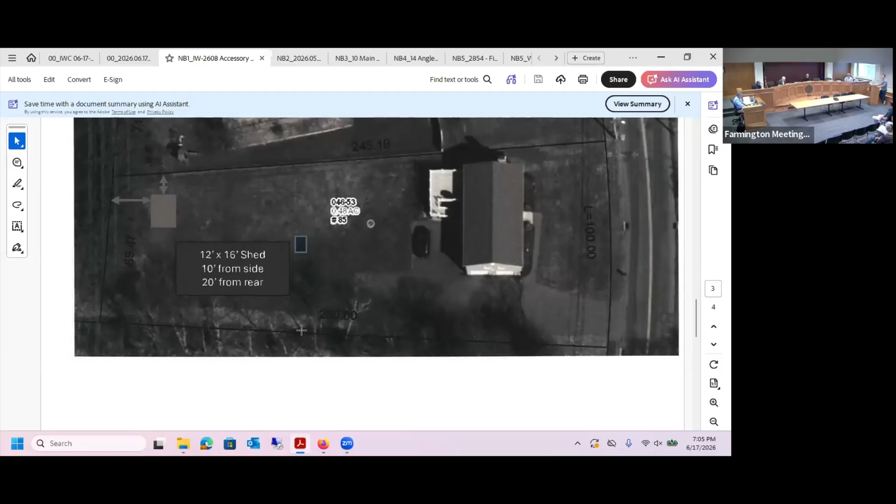Do you want me to repropose, just a quick summary again? Yep, if anything's changed. Adam Okarski, 85 West District. I'm looking to put a 12 by 16 prefabricated shed in the back corner of my property, the northwest corner. There's an easement and a storm drainage ditch along the south side that goes to wetlands further back. No change to the plan. Still the prefab shed, still no excavation, just 3 to 6 inches of gravel pad for it.

Excuse me, Bruce. Yes, sir. On the actions, it says we performed the site walk. No, I noticed that a little earlier. It's a mistake on my part. There was no site walk, but there was a determination of non-significance.

And you're agreeable to erosion control around the area when they're doing the delivery? Well, I don't think he needs it now since he said they're not doing any excavation. All they're doing is putting out a gravel pad. Okay, so you probably don't need it then.

Questions from the commission? Richard, no questions. Dan? No, Dan's not here. Mark Simpson, no questions. Alana, no questions. Frank, no questions. Andre, any questions? We accepted the application at the last meeting, so I have no questions either.

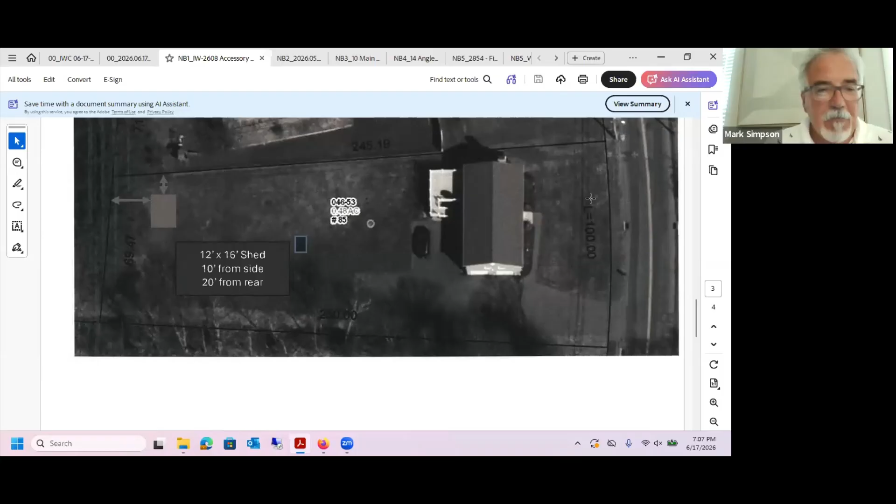Seeing there's no questions, the chair will entertain a motion to approve the application. So moved, Mark seconds. Motion is made and seconded to approve the application. All those in favor say aye. Aye. Opposed? Abstain? Motion passes.

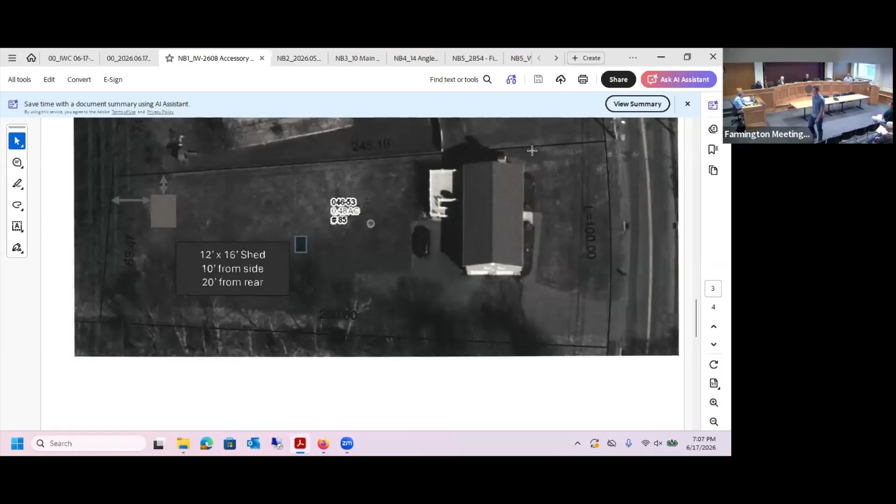Next item on the agenda, Jeffrey Moose, 152 Wood Pond. Good evening. I suppose just reading the description from June 3rd would be the most accurate. Can you give your name? Sorry, Jeffrey Moose, 152 Woodpond Road in Farmington.

It's an application to install a maintenance path for lawn equipment in our backyard and additionally install a dry well to handle the runoff. That pretty well cover it? Just for the record, we did have a site walk at the residence on June 11th. We need to determine significance based on the information from our site walk. I think it's a pretty minor project and shouldn't require a public hearing.

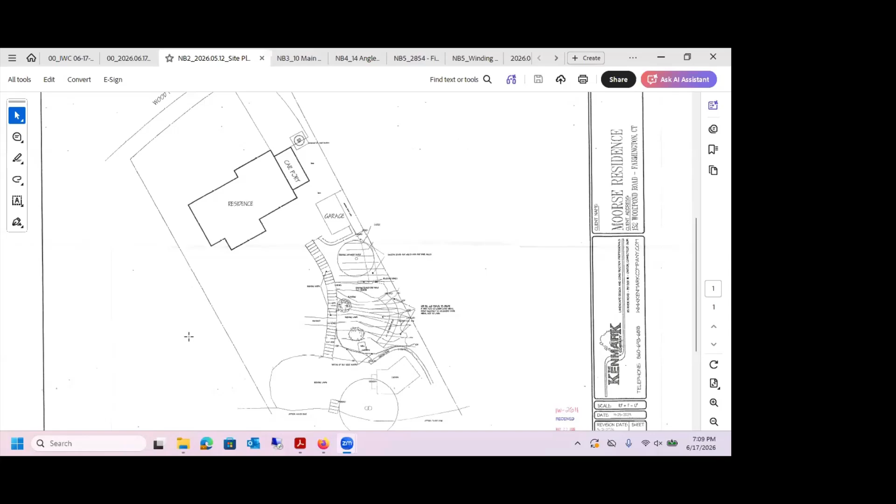But let's see what the rest of the commission says. Andre, do you feel it requires a public hearing? I do not think it does. No. Rich Berlandi? Non-significant regulated activity. Very good.

Mark? Non-significant. Okay. Alana? Not significant. Frank? Non-significant.

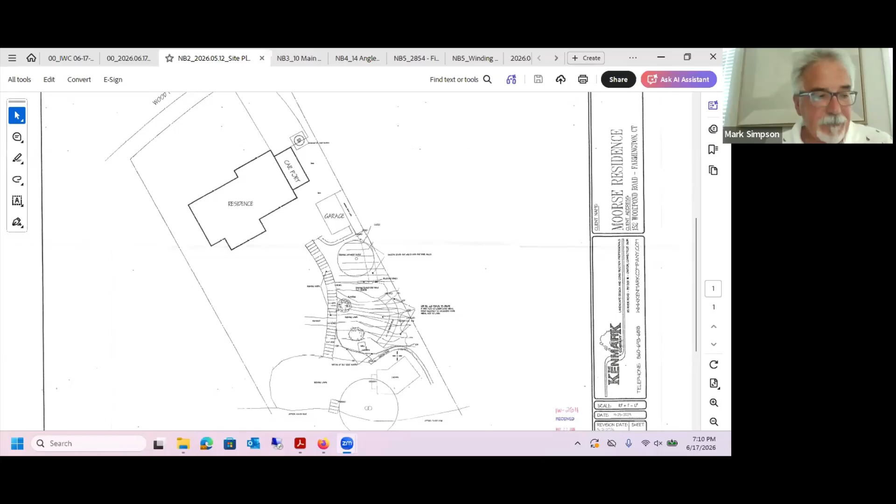Okay, so the chair will entertain a motion that this is a non-significant activity. I so moved, Mark seconds. Motion was made and seconded that this is not a significant activity. All those in favor say aye. Aye. Abstain. Motion passes.

All right, and now, did they provide an estimated volume of fill? Yes, you did. And at the site meeting, we just talked about the erosion control and. Yes. All right, are there any other questions from the commission? No. Any questions from the commission online? No. Seeing there's no further questions, the chair will entertain a motion to approve the application for Wood Pond.

So moved. 152 Wood Pond Road. Second. Motion was made and seconded to approve the application for 152 Wood Pond Road.

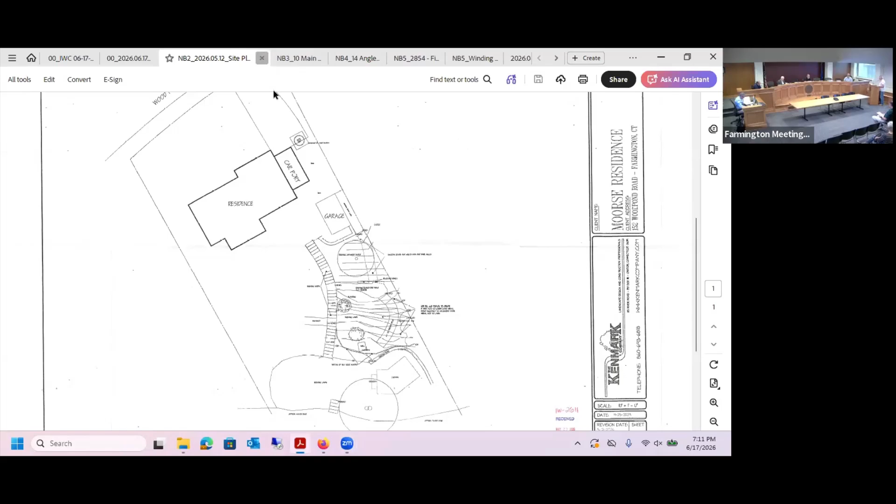All those in favor say aye. Aye. Opposed? Abstain? Motion passes. So work with Bruce, let him know when the work's starting, so they can get out and check the erosion control.

Good luck with your project. Okay, thanks so much. Say hi to that eagle that we saw here. Thank you very much. Have a good night.

Okay, next item on the agenda, Jason Levesque, 10 Main Gate. Can we have your name and address for the record, please? Good evening, Jason Levesque, 52 Climax Road, Simsbury, Connecticut. Agent for the current owners of 10 Main Gate, 8446 Main Gate.

We are proposing a single-family new construction with a pool house and a pool. Most of the regulated activity or upland review cuts across the existing pool or the proposed pool and pool house there.

Some work, Bruce, I have control of this, right? No, you don't. Okay, no, what do you want? We can go down to the second page. Next page, please. Is this the updated version?

Yep, it is, this is the updated version. I'm sorry, I can see that now. You should be able to scroll down to the left. Where do you want to go? All right. Yeah, all right, you're good.

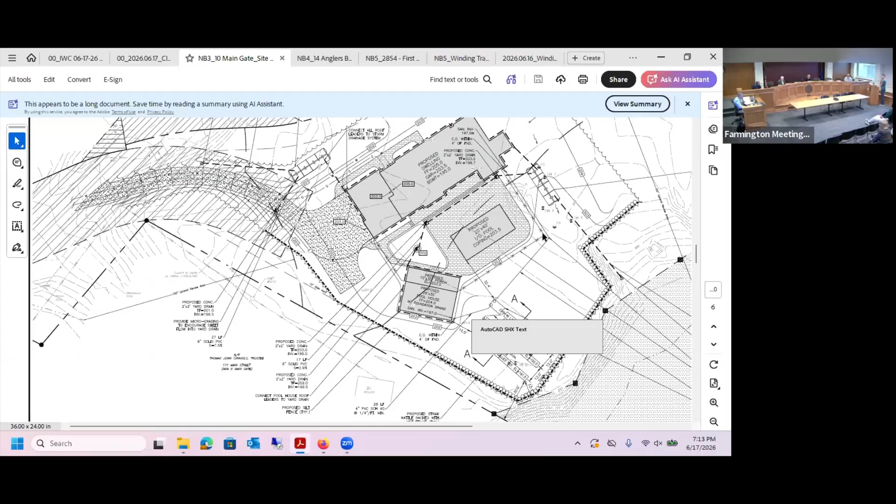Yeah, that's fine. I had some comments from Bruce, and I believe some concerns from you guys from the board that I wanted to take care of right away. So that included the straw wattle, erosion control down gradient of all the work proposed.

Also included clearing limits. So we can actually, Bruce, if you don't mind, scroll up, so you can see the wood line, the clearing limits going around the property.

Also put in signage for conservation, just to note that we're retaining the conservation there. So it's at that corner as well as the northeast corner on the upper side of this plan here.

When we overlay, do you have the old plan by chance? I do, yes I do, with the old site plan. If we need to, the difference is substantial from the original proposal, the subdivision. Yeah, no, I did this here, I think we used last time.

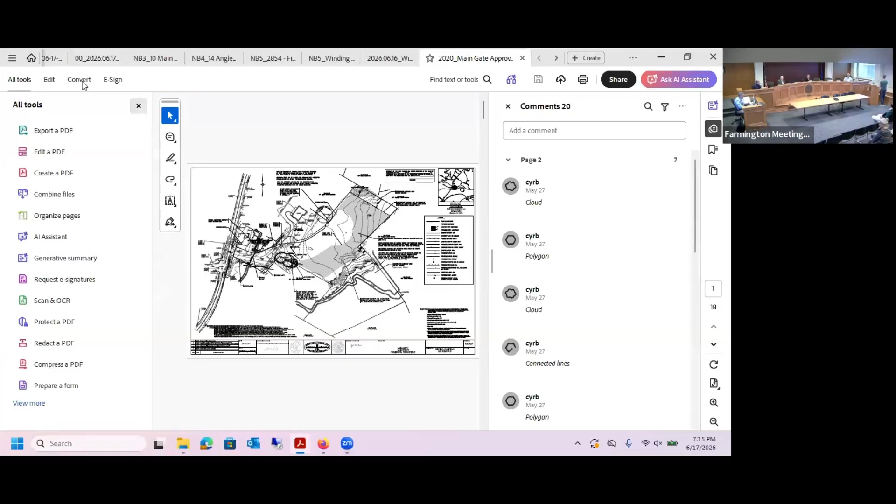That's fine, you don't have to, unless there's questions from the board. But what was passed last time actually had considerably less upland review area or wetlands area disturbed. Even on that one part of the property, a lot less clearing in the regulated area.

Here's the approximate location of the new home. Here's the approved locations of the previous homes here. Yeah, perfect, thank you.

I believe you went out for a site walk, saw the stakes there. I'm hoping that was helpful. I'll leave it up right now to any questions you may have. Okay, thank you.

Bruce, I have a question. Is all the conservation easement paperwork in place and already filed? Yes, the conservation easement and the conservation easement map and document have both been filed. The only thing not done was, as discussed, I would want all these easements demarcated with our medallions. Okay, all right. Yep.

And you changed from hooking up to the sewers to an on-site system, because with one house compared to four houses, you didn't have the need to rebuild the roadway and put in the sewer system. Correct, yes. Talking to the town, no need to bring sewer up for one house.

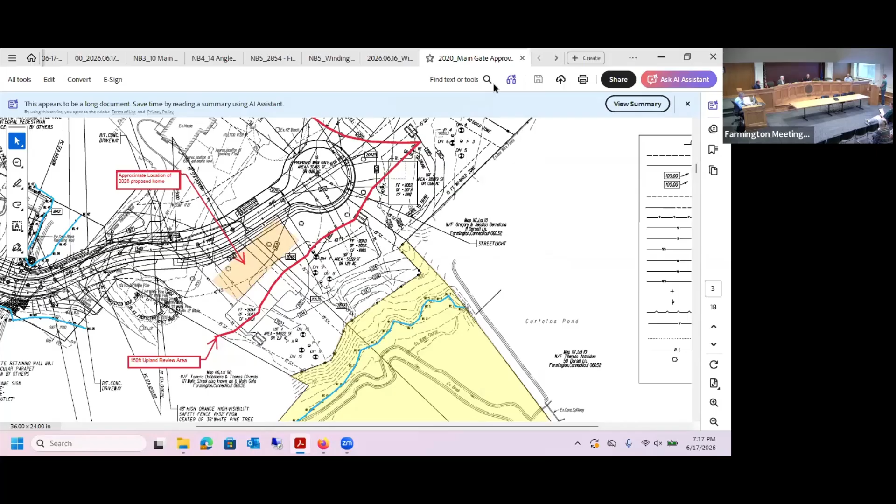We do have to determine if this is significant from findings for standards. I think it's not, but let me go back to you, Rich. Do you think this is not significant? Yeah, I would say it's a non-significant activity.

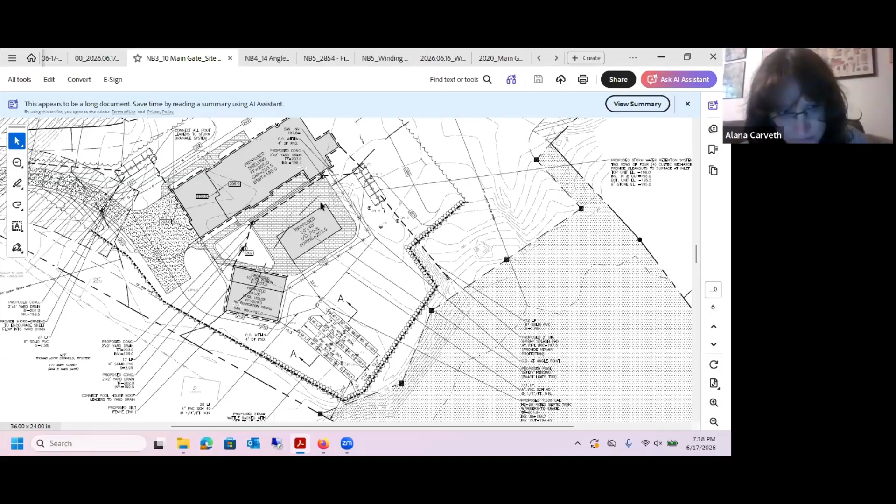All right, Mark Simpson, do you have any questions and do you think this is not significant? No questions, not significant. Alana? No questions and not significant. Frank? No questions, not significant. Andre? No questions and not significant. Okay, all right, since there's no other questions and there's agreement, this is not significant.

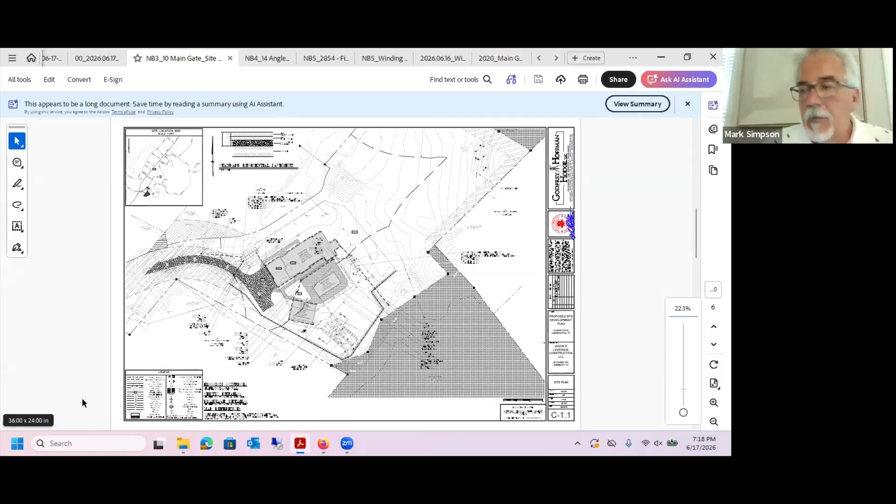Let's entertain a motion that this is a non-significant project. So moved. Motion's been made and seconded, Mark. Okay, motion's been made and seconded, this is not significant. All those in favor say aye. Aye. Ayes. Opposed? Abstained? Motion passes.

Excuse me sir, is the public allowed to ask any questions? No, because it's not a public hearing, and I apologize, I probably should have told you, I wasn't even thinking of that, it's not a public hearing. Couple of questions on the neighbors. Right, the setback. Again, you can work with Bruce if you have any questions. Okay. Somebody come in, I'm looking right now.

Oh, we're good. Oh, Andre just tried getting back in. Sounds like he's probably having some audio problem.

Okay. Right. All right, so a motion's been made that this is not significant. Now the chair will entertain a motion to approve the application.

So move, Mark. If you don't mind, Chair, I'd like to add a few items: he's done the tree clearing, the erosion control is done, but C, clearly depict the limits of the driveway improvements, and D is the cross section of the driveway. And I think that was it.

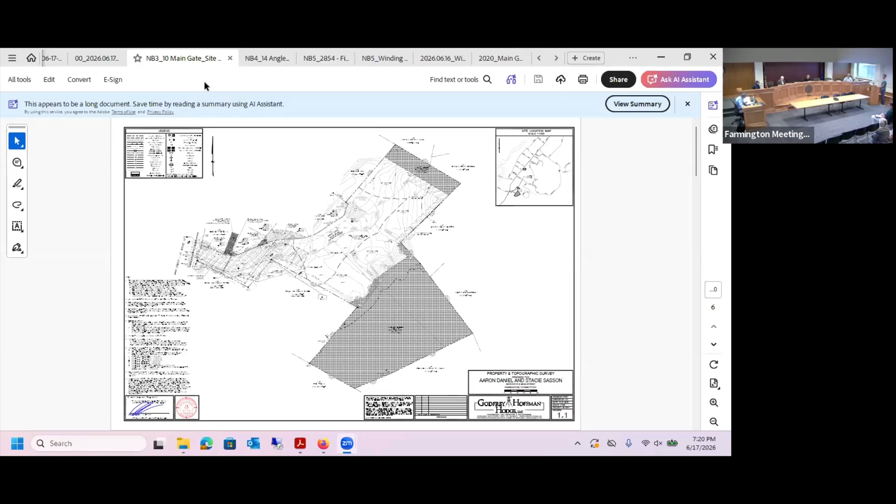When we did the site walk, we didn't really clearly depict the limit of tree clearing. Yeah, but he's got that now, on the revised plan, right here. I'll zoom in a little more. They just show the tree clearing right through here, right?

Okay, yep. So I'll amend my motion to include those items. All right, so the motion's been amended to add C, D, and G.

We need a second for that motion that Mark made. Second. All right, motion made and seconded to approve the application along with the stipulations of C, D, and G, and the Wetlands Commission agenda review.

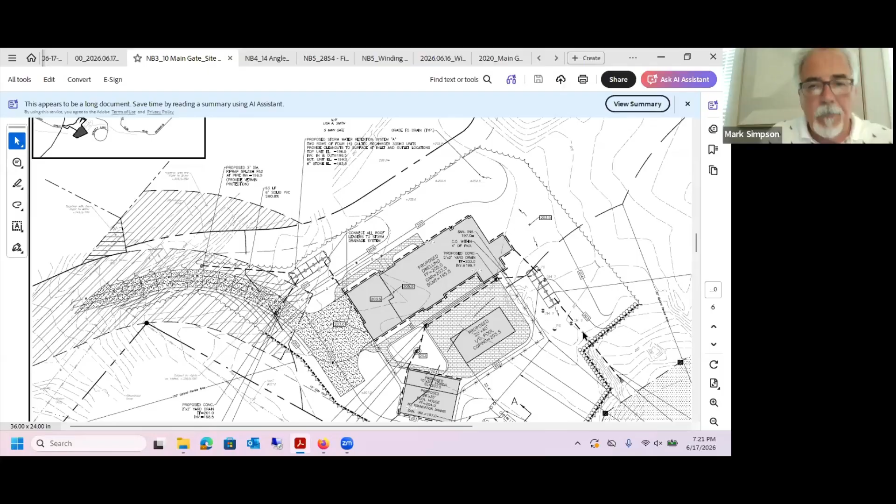So all those in favor say aye. Aye. Aye. Abstain. Application approved.

Please continue to work with Bruce on the status of the project. Good luck. Yeah, thank you very much. Have a good one.

Okay, new application. Robert Rigney, yes sir, 14 Anglers Bend.

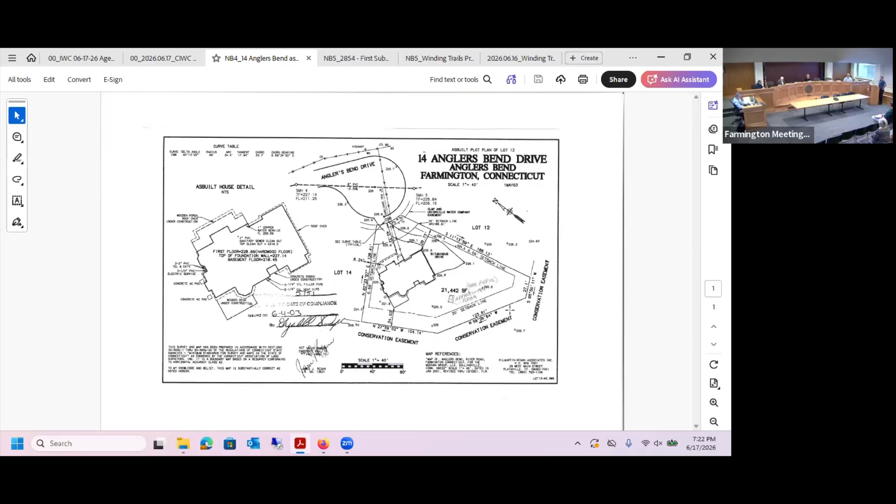Greetings and salutations. For the record, I'm Robert Rigney. I reside at 14 Anglers Bend in Unionville. The lot number, however, is 13 if you're looking at town maps. I'm here before you seeking approval of the siting of a prefabricated tool shed for the backyard that would be laid on a thin layer of stone.

The site for me is optimal for a couple of reasons. Function, the ground is level, so there's no digging involved. It does not bifurcate the recreational area of the yard, and it would not be seen from the road. So it's a 10 by 12 shed, prefabricated, just sitting on stone, no excavation.

That's correct. Okay. Bruce, do we have the record on whether it's 13 or 14? Well, it's house number 14, lot 13. That's the subdivision map right here. The subdivision map says lot 13, and house number 14. What's the discrepancy?

I guess they're saying it's 13 Anglers. No, it's 14 Anglers Bend on it, lot 13. Yeah, it says 14 Anglers Bend, lot 13, right here. Oh okay, that's what they're about. That's correct. All right.

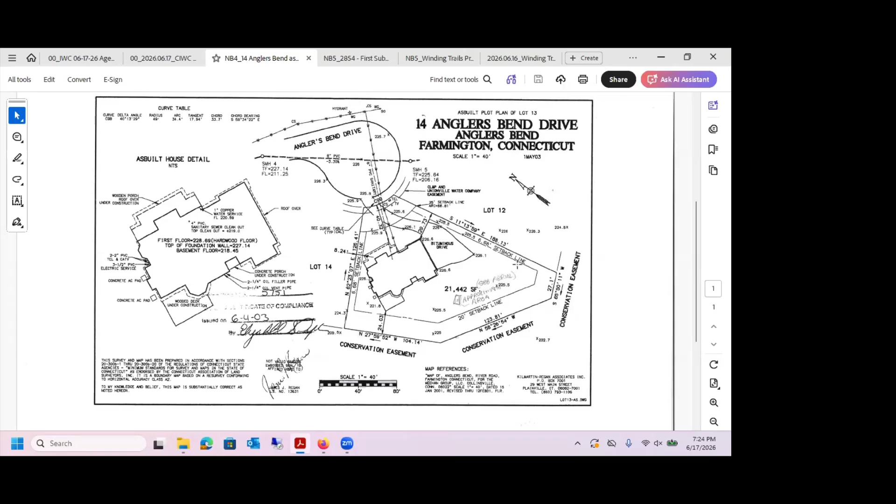Mark Simpson? I have one question. The conservation, I guess this is because of the conservation area. Is there markers along that area signifying there is a conservation easement? Not that I've found.

Chair, if you don't mind me answering that, this is a rather older subdivision, and I don't recall us having the medallions at that point. So I think the subdivision was early 2000s. I've been there the last 16 years at this particular residency, 30-year residency in Unionville.

My only concern is we had somebody previously who had a conservation easement that had markers and still went into the conservation area. I'm not saying you're going to do that, but it's very possible a future owner would not recognize what they can and cannot do in their backyard. I'm just proposing maybe we should be putting markers there, but it's up to the commission. That's my only question.

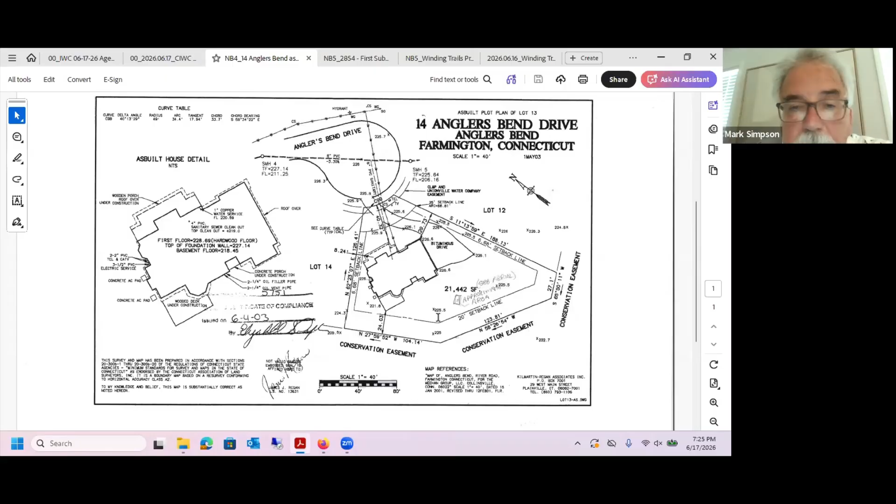Well, we could either have him put markers in or mark out the location of the shed. Bruce: the shed is marked, I have sticks where the shed is going to be.

Have you been to the site? I have not been. I think I gave you an aerial of that, where it's going to be. Did you? Yeah, I see where you have it shown on the plans. We've had people cross over into the conservation easements, and I think that's what Mark's concern is. As a private development, we have an HOA, and there is a booklet.

Realtors are supposed to explain all those elements to buyers. I don't know what other buyers might need to do as far as studying the issue with properties. That's always the issue. Either it doesn't get discussed or it goes right over their head.

They're like, yeah, okay, whatever, but we have the medallions, so that's easy. We give them to you and you just have to install them on a post. So if the commission wishes to do that, we could just have you do that. That's simple.

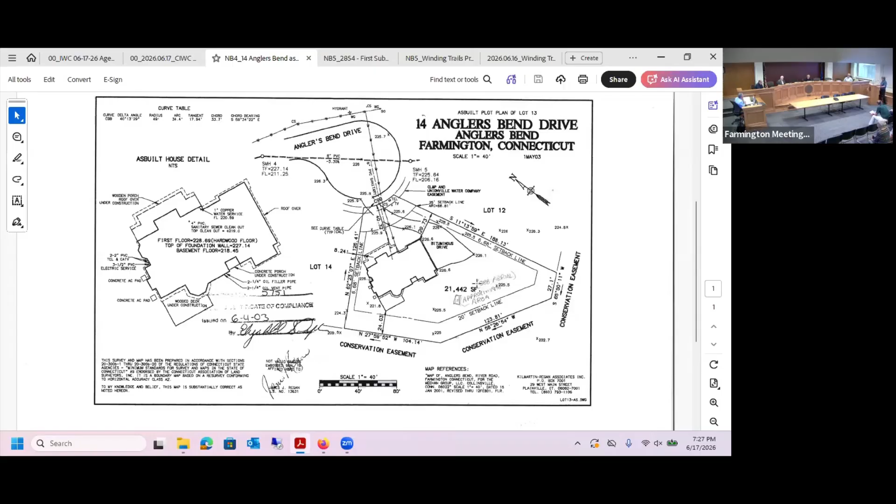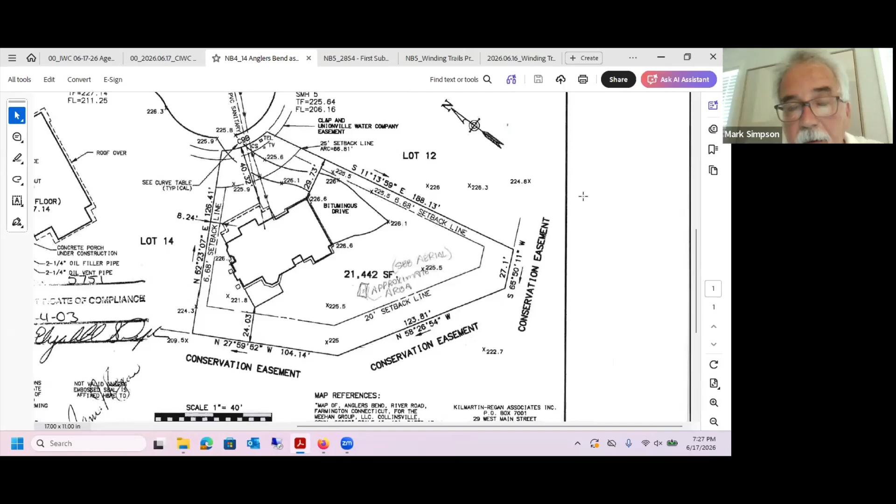Mark, are you looking to have some medallion installed? That would be my suggestion, just because they may always be there, I just haven't seen any. I don't know if they're there or not, but it's better to err on the side of caution. Yeah, I agree.

Bruce, it doesn't impact the owner at all. It just determines where the easement begins, and no one should be building or doing anything in those areas anyway. So it's a good informational piece of marker to tell people what they can do and not do. That's all.

Bruce, would you normally go out and check this location of the shed? Yep, at some point we do go out and we can coordinate, almost like the erosion control inspection. We can go out there, look at the markers he has and just confirm it. And you could bring a few markers with you, give them some guidance to where to put them. Yeah, we can try it.

It is a little odd shaped lot, and then there's elevation to it, so if the property pins are not there, it does become a little tricky, but I think we could work something out.

All right, we'll continue on. Mark, was that all your questions? I don't have any questions.

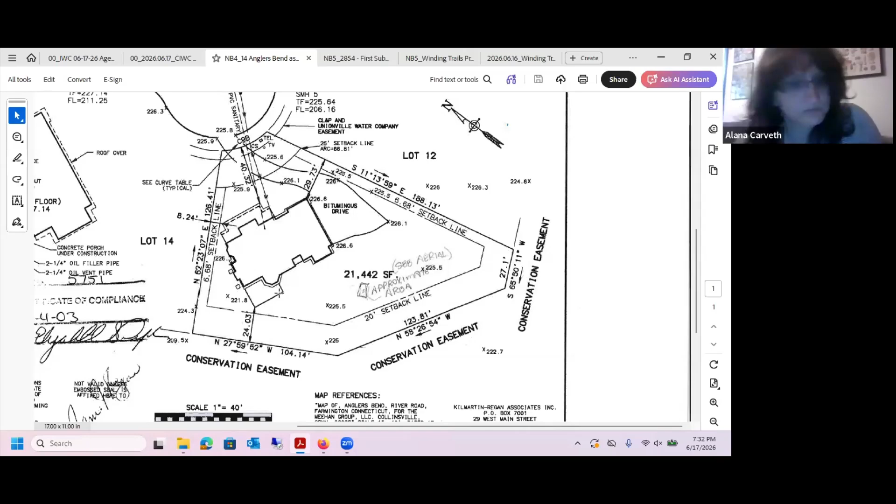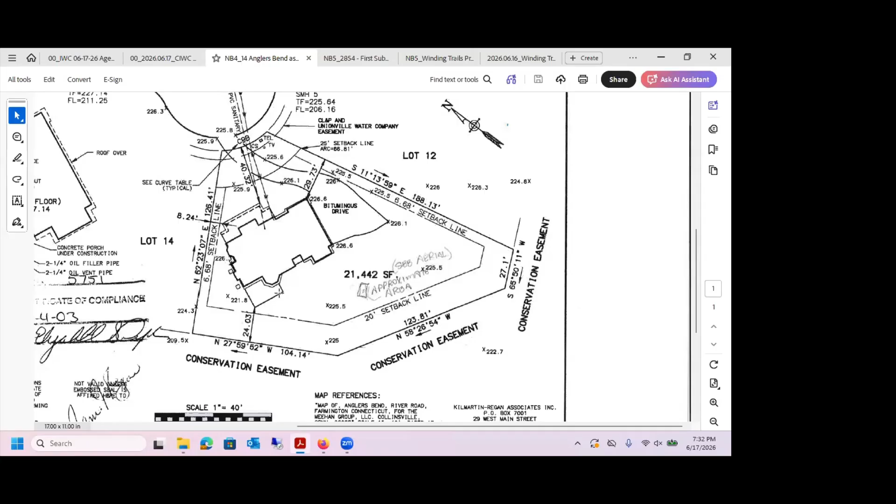The chair will entertain a motion that this is a non-significant activity. So moved, Mark. And a second, please. Second. Motion's been made and seconded that this is not a significant activity. All those in favor say aye. Aye. Opposed? Abstain? Motion passes.

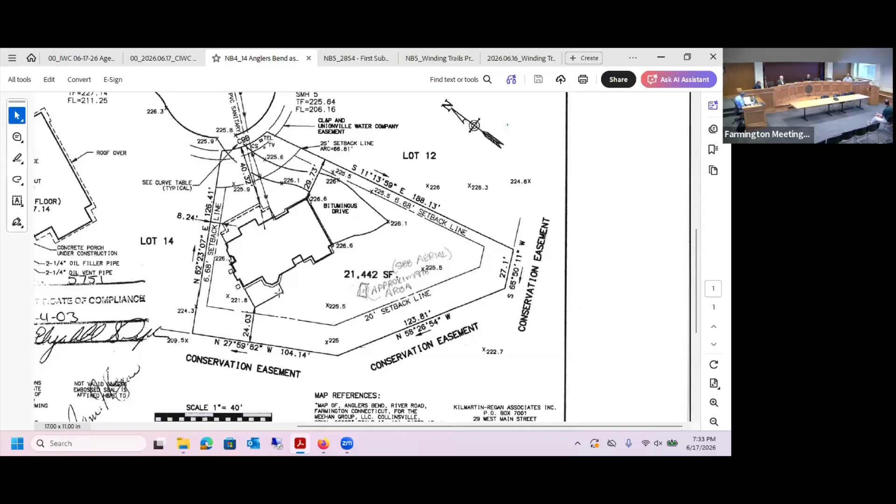So next meeting in two weeks, we will vote on this to approve the application. Very good, thank you for your time. Anything else comes up, work with Bruce. All right, let's go on.

All right, next item on the agenda, Winding Trails.

So you're probably all familiar with Winding Trails. We're a nonprofit just down the road, 386 acres. Started out as a summer day camp in 1947 and have grown to quite a facility.

The proposed project that we have is a roadway and parking lot reconstruction. We have about a mile of roadway, Winding Trails Drive, that runs through the park. We replaced half of it back in 2011. The other parking lots and roadway have been in there. I've been there 40 years now, and they've been in as long as I have, so they are showing their age and deteriorating and need to be crack sealed quite often.

This project really deals with three things. One, repaving the existing parking lots, which need to be done. Two, it will improve safety and traffic circulation in our camp area by improving sight lines, widening the road in two areas, and adding sidewalks and additional parking. And thirdly, we are taking this opportunity to improve some drainage issues.

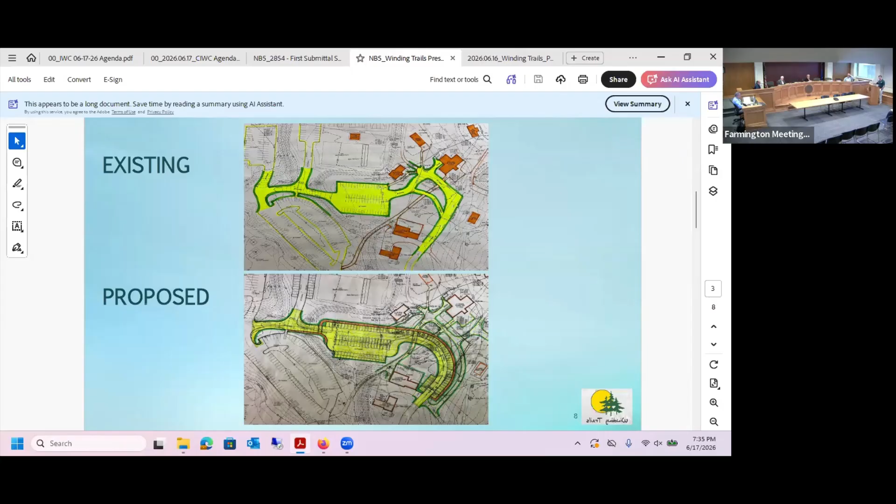This map shows you the photo at the top is our existing conditions. Over time, as Winding Trails expanded, we added different areas. The two parking lots to the left of that main parking lot were added years later. So that parking lot used to end, and then we added that back part. In the top areas, you can see it doesn't flow well, it's 90-degree angles. Years ago we added that little cut-through for parent drop off. We've got 620 kids a day that come to camp, and starting Monday we've got about 200 cars that drop off every morning and pick up every afternoon, and 8 school buses that come through there. So it works, but not real efficiently.

So if you scroll down to the next photo, you'll see what is proposed, which will really clean up a lot there. We'll add additional parking around that whole horseshoe, and we've got all new sidewalk on the back side and some crosswalks down to the beach so the kids can get to the lake for swimming. We're proposing to widen the far left side of that map, it gets tight for the buses and cars coming in that corner. And just off the map is a little widening as you come up from the stop sign. So all the work is concentrated in this loop in the center of the camp area.

And if you want to show the overall with your wetlands delineation, I'll let Jim talk a little bit about the three areas that are in the upland review. Okay, Jim.

Yeah, Scott mentioned, my name is Jim Platosh. I reside at 27 Highwood Road in Farmington, and I'm here as a volunteer to help this project. So as Scott mentioned, the purpose and need is primarily to replace the pavement, improve circulation, improve safety. And if you heard the numbers he mentioned, vehicles and number of campers, it's quite a bit going on in a very short amount of time.

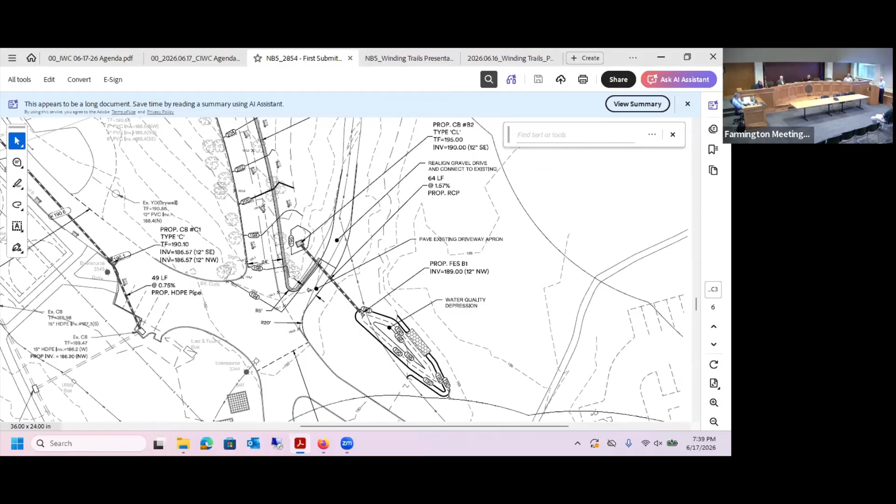You can see it in plan view before overflowing and being discharged. You can see the southerly limit of it is right at the regulatory limit, but this will be a big improvement. The area that'll be constructed, Bruce has a nice photo of that. It's currently a grassed area, a fairly level grassed area, and it would be to the right of that sign you're looking at now.

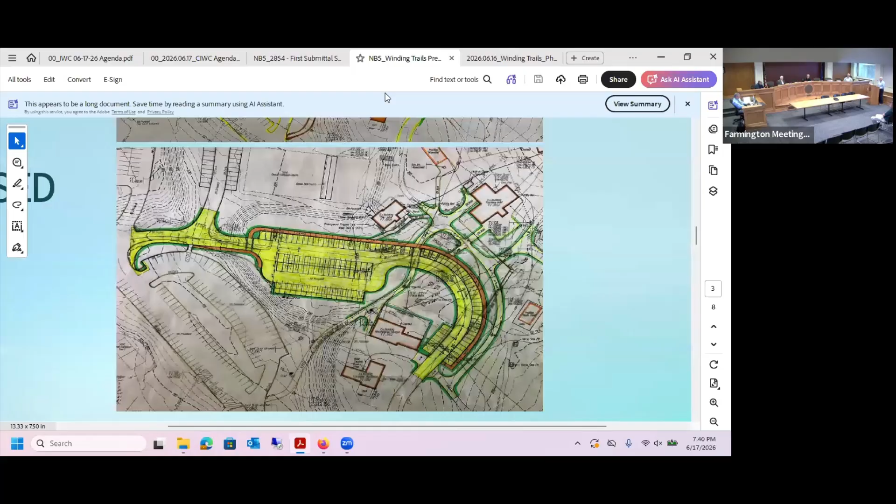So that's where this water quality basin will be constructed, and it'll be one of four that we are building. So as we continue up the road, we start our full depth reconstruction project, and again we're rebuilding the road to get a minimum of 24 feet. Then as we get up the hill, we get into a realignment.

To the left side of that and in the middle is a large parking area. That is pretty much what's there today, except what's there today was built probably better than 45 years ago. We're putting back the parking lot, similar dimensions, similar footprint. We're able to squeeze in 8 more spaces in the center, so we get a little more efficiency out of it, but essentially it's the same footprint.

Two things we're doing with water from that. One is, if you notice on the south side of that parking lot, is another depressed area that we're going to create and let half the parking lot flow into that. The other half will go into an existing basin and it'll discharge under what looks like a roadway that goes up to the Sportsplex parking area. Then there'll be another water quality depression constructed before it goes into an inlet.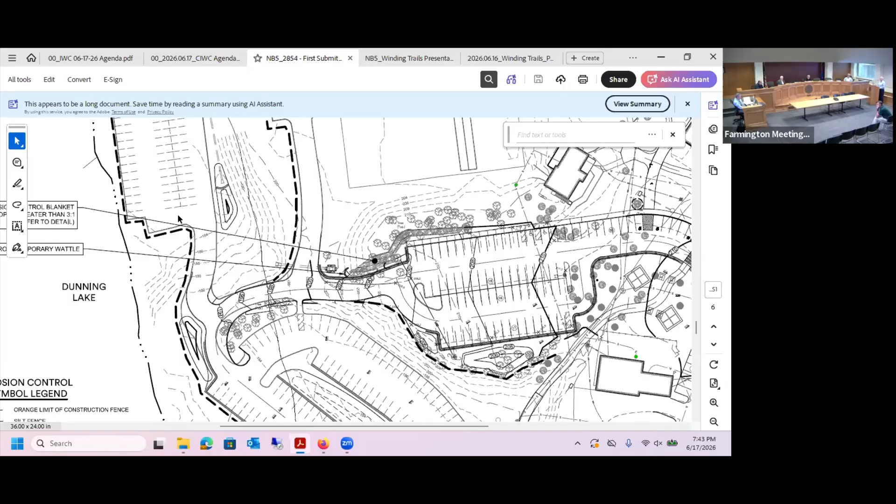If you look to the north, there's a lower parking area. And here's where we change venue. At the base of that hill, not far from the regulatory limit, we stopped full depth reconstruction. The parking area that's in the top left of this photo you're looking at, and another parking area that's just off the photo - okay, thanks Bruce.

That part we call the Sportsplex parking area. Both those parking areas will be replaced in kind. We're basically going to mill the pavement and repave it in kind, similar to what's there, and really no changes to the footprint or the layout.

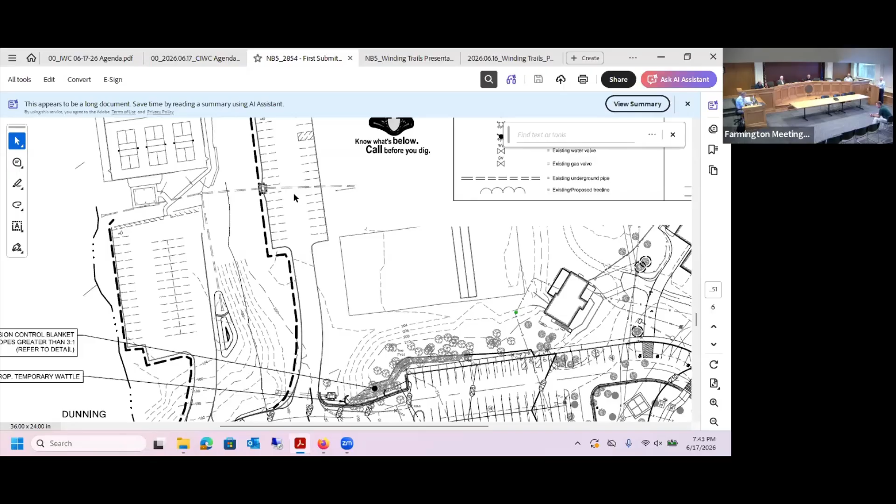So those, not only those two parking lots, but Bruce, can we scan down to the bottom more? Okay, now this is the primary parking area.

We call it the beach parking area, and that area too will get repaved in kind. There's a big island between the two parking areas - I call it an island. It's really a depressed area with mature trees, and today it functions as what you'd refer to as a rain garden. We're going to enhance that, make it a low point, concentrate flow there, and let it permeate back into the soil. That's how we're going to handle the runoff from those lots.

As we proceed, Bruce, to the lower right, we're going to reconstruct those parking lots, and then continue to reconstruct the driveway all the way back down to the stop sign. If you're familiar with the area, you're going past the grill, the bigger rectangular building is the bathhouse, and that'll get reconstructed in kind back to the stop sign and the beginning of the project.

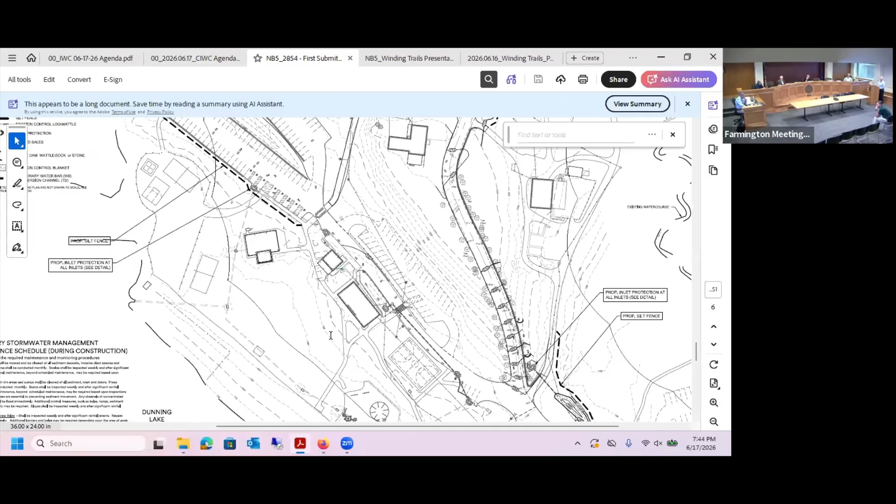One little improvement we're making is right behind the bathhouse, which is a grassed lawn area today. We're going to create a depression there and put a good part of that roadway runoff into that depressed area, then into a basin. That gives an opportunity for some overland flow before it's put into a pipe system, and then we're going to introduce that into the existing system that's in place.

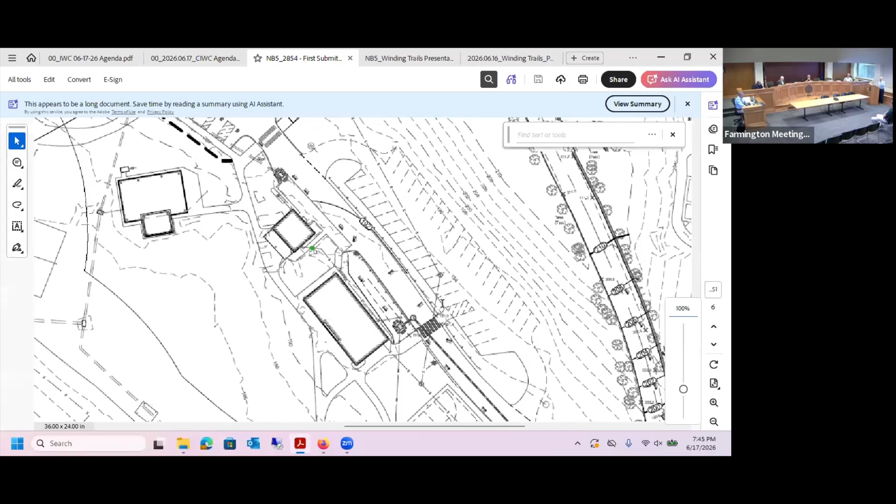So that's just a quick snapshot of the project. Again, we have one regulated area that we looked at in the upper left corner, but I wanted to show you some of the other things we're doing to improve drainage.

We hope to start work this fall and get as much done as we can before the winter. We're constrained by a lot of activities that go on in camp in the summer and some fall activities, but as soon as those are done, we'd like to start and get as much work done as we could, probably not pavement, and then come back in the spring to pave and get ready for spring activities and the start of camp next year.

So it's quite an ambitious project. The board is totally behind it, and that will complete all of our roadway surfaces and bring them up to date, getting us out from the maintenance costs of how much we spend a year maintaining cracked and failing pavement. But we have to say we were lucky for the number of years we got out of that pavement, far more than what you'd expect as a 15 to 20, 25 year life of pavement.

So that's just a quick snapshot of the project.

Any comments, questions? Yeah, Mr. Chairman, trying to get a little better feel for it - so that curved driveway, you're pulling it away from Garmany Hall a little bit?

Exactly, yeah. Bruce, can we go back to the two colored up drawings that you showed earlier? Okay, so if you go back to the beginning, the first one - if you look at what's there, that's what's there today.

Right, it's not very efficient. Picture 9 school buses lined up picking up children, and then having parents - 150 vehicles or so - and then mix in 200 people arriving, or 150 employees arriving to get to work. There's a lot that goes on with some very poor geometry, and it's all about safety.

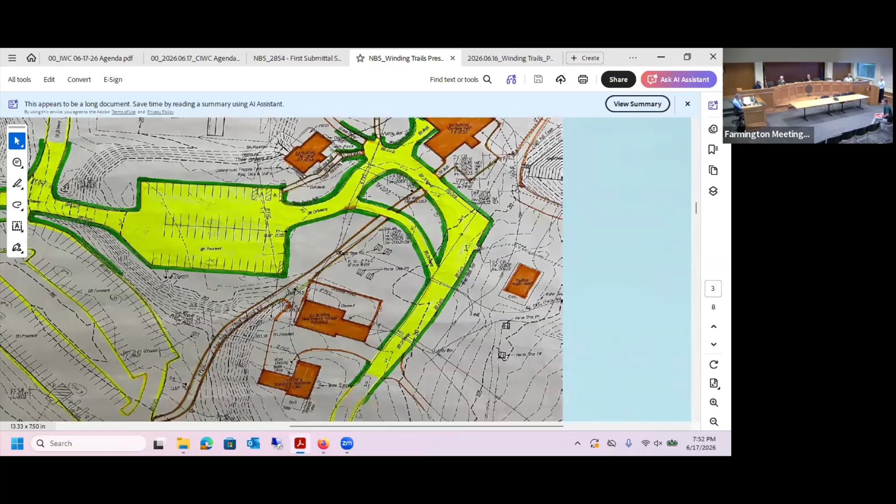And you've got, in a sense, 2 driveways, a narrow one that's used for drop off, and then the wider one that has the angle to it. That's existing pavement areas. And then when you scroll down to the proposed, you could see you're going to have a 24-foot wide roadway and an 18-foot deep parking stall around that curve. So how that area relates to the existing, it's probably more, but not a lot more.

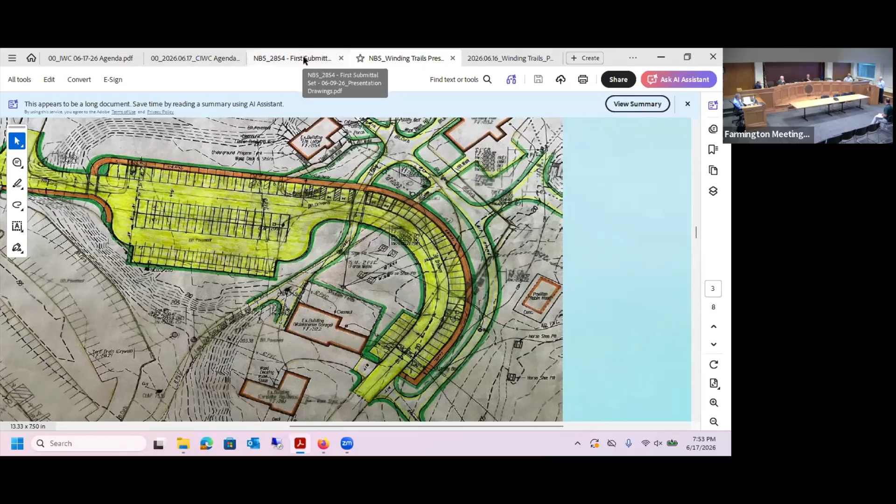We can, if you want, run numbers. I want to say it's in a drainage report, and I'm sorry I don't have that available. Okay, and the existing pavement that's not being used, that'll be converted to lawn and sidewalks? Yes, we are going to put a sidewalk in front of Garmany Hall.

So there is, if you look, there's a driveway, if you will, that goes to the Garmany Hall kitchen area. And that driveway is used for deliveries in the morning. Trucks deliver juice and ice cream. Yeah, so very early. We're building that driveway out of concrete, so it'll look like a walk.

We don't intend to use it as a driveway, but it'll give the appearance of a walk. And then going left to right will also be a sidewalk. It'll go across in front of Garmany, and it'll terminate at a round.

Well, that's going to be a feature. It's just a small round open area in the middle. We'll probably have a flagpole, a sign. It'll be a focal point. And then there'll be a sidewalk, of course, connecting it to the roadway, a short sidewalk connecting it to the patio. We talked about a sign signifying Winding Trails Camp, but it gives it an identity to camp, was the intent.

And then that will lead to a crosswalk, which then is the gravel walkway down to the beach. And that's how campers get to the beach.

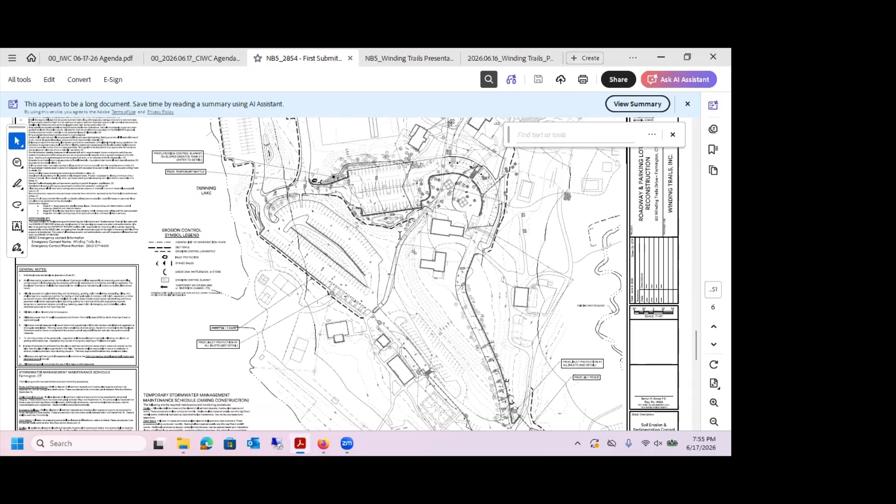All right, Andre, questions? I do not have any questions at the moment. Okay. Mark? No questions at this time.

It's an impressive undertaking. You're doing probably more to benefit the pond, the lake, by what action you're taking. But I believe, and maybe this is not the time to say it, maybe it is, I think a site visit would be helpful to understand the immensity of this project. That's all.

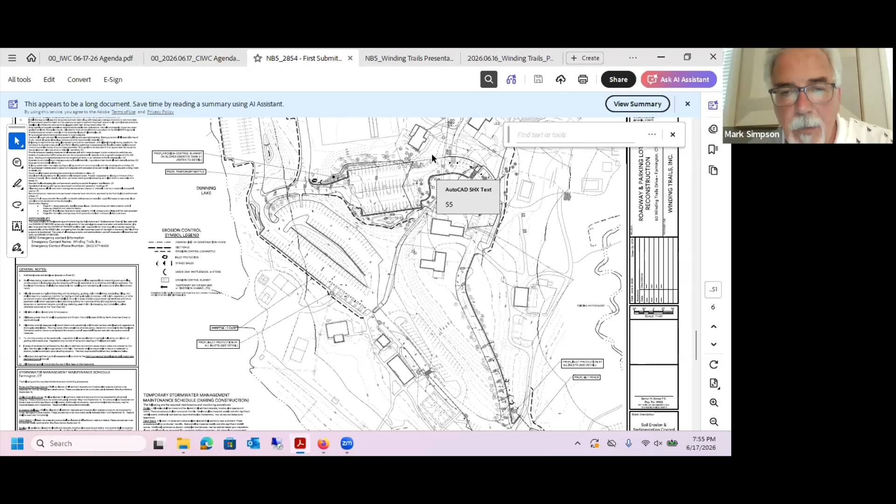Yeah, I tend to agree with that. The main parking areas are staying the same, but we could see where the tree removal is being done. A lot of this area, all of that work is not in the 150-foot upland review area, but I think it helps us see how much of a change the project and the improvement will be.

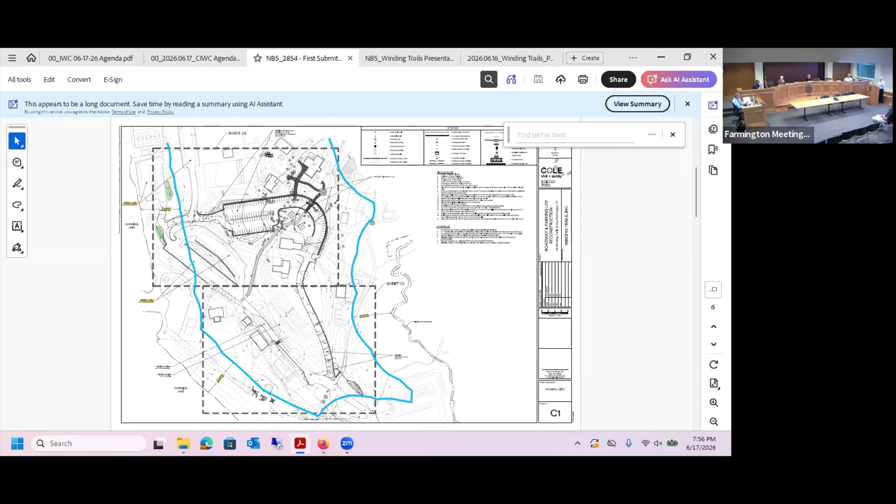Okay, Alana? Yeah, I do have questions about these depressions or detention basins. Is there any further water quality treatment happening to the water in those, or is it just through infiltration?

No, the intent was to have it settle out. They will have a stone weir overflow, each of them. So that's all we are doing. Let me make it clear, we'll follow every required regulation during construction regarding sedimentation and erosion control. It's a big part of our plans specifying what has to be done and how it has to be done, and we will make sure that is in place.

Okay. Is there any further planting of vegetation around these depressions? So in simple terms, right now the plan is to hydro seed all disturbed areas. We're looking to establish grassed areas everywhere we disturb. As far as plantings go, we do want to revisit landscaping. We are taking out some trees which have served their useful life and don't contribute a lot, and replace them. Our intent is to look at the plan when completed, the area when completed, and look at what we want to achieve for plantings. So there will be a follow-up planting plan, but at the end of construction, we will, if nothing else, perform a turf establishment for all disturbed areas.

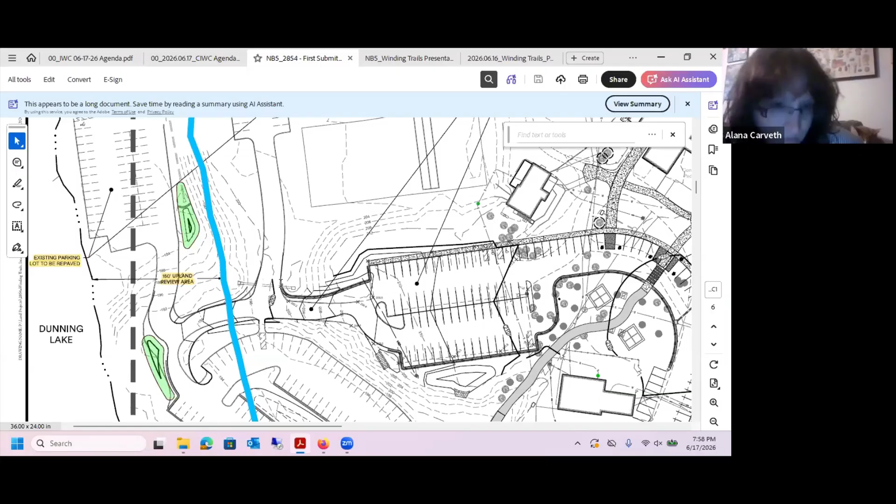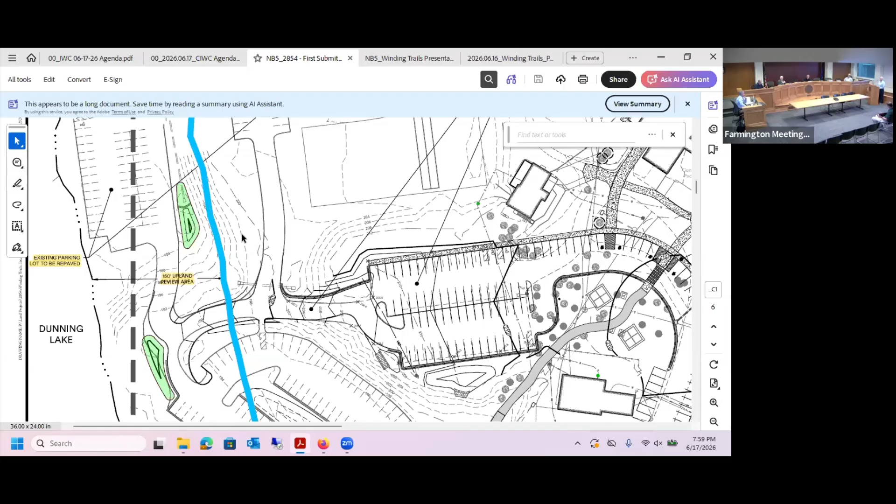Keep in mind too, so you're aware, that area is extremely sandy. So there should be, I don't expect any standing water in many of those ponds for more than 12 hours, 8 hours, it'll be gone. This is all an extension of Dunning, which is over here on the left of the drawing here. So while I agree, yes, I just keep that in mind.

Very highly infiltration, Bruce, that's a good point. If you look at Dunning Sand and Gravel, our neighbor, you don't have to be a geotechnical engineer to see what quality sand there is. And we learned that when we created Sportsplex and removed 110,000 cubic yards of material and found nothing but sand and gravel. So it does work in our favor.

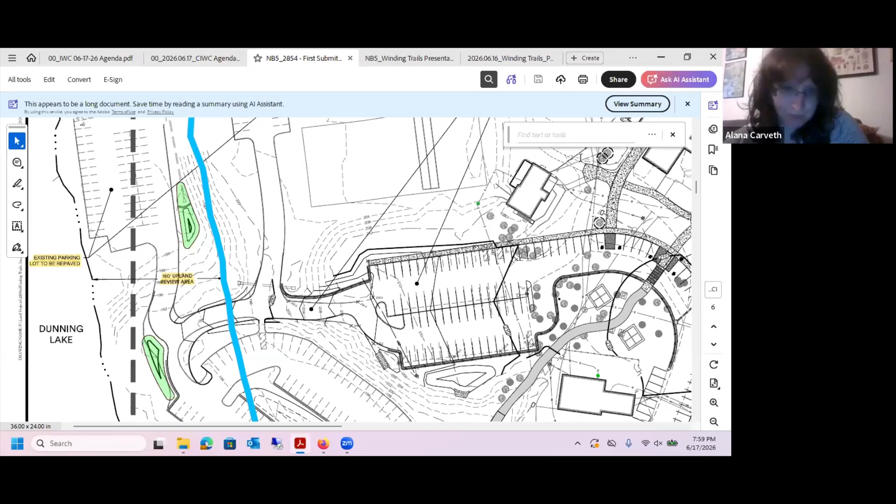Okay. Is that it, Alana? Yeah, I have no further questions. Frank? No questions, but I believe that it would be beneficial to have a site visit on it. Yeah, I agree.

And you guys, the town's recommendation about a combination of both silt fence and straw wattle in the construction areas, is that agreeable? Yes. All right.

Well, let's accept the application and then we'll talk about the site visit. Chair will entertain a motion to accept this application. So moved. Second. Motion is made and seconded to accept the application. All those in favor say aye. Aye. Opposed? Abstain? Motion passes.

I think, well, I'm very familiar with the area. I think it'll be helpful to see how the construction's gonna go. So I think a site walk would be a good idea.

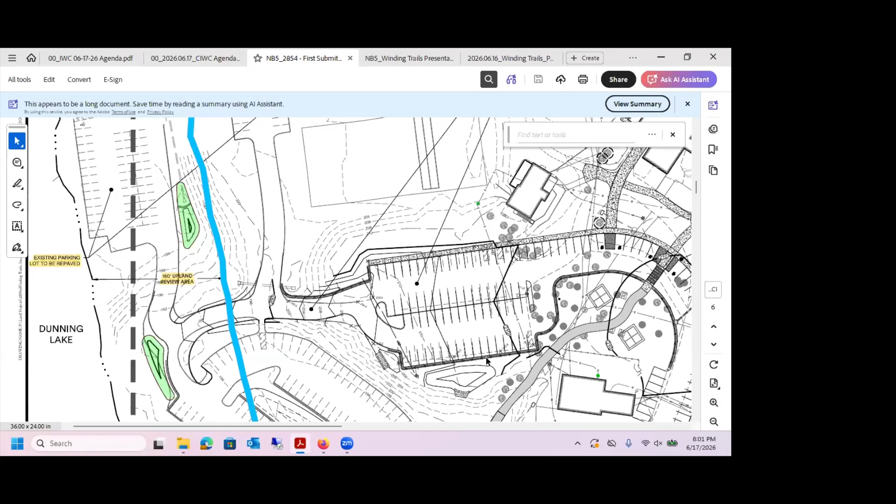Rich, how do you feel? I would agree. Okay. Andre? I also would agree. Okay. And Mark and Alana, I think Frank said that I agree. Agree. Yeah. All right, so Bruce will have you schedule a site walk.

What would be good, I'm thinking next week, because the week after is approaching July 4th, and our meeting is the week after that, on the 8th. So if next week works for everybody, maybe Wednesday or Thursday. I think next week is better, stay away from the holiday. Agreed. So let's shoot for Wednesday, the 24th at 5.

I'll send out an email to confirm. Can somebody be there to answer any questions on the project? That work for you guys? You don't have to be there, but I could. It doesn't have to be you guys, if you're confident since we walked it the other day. I feel pretty available. You're available, perfect.

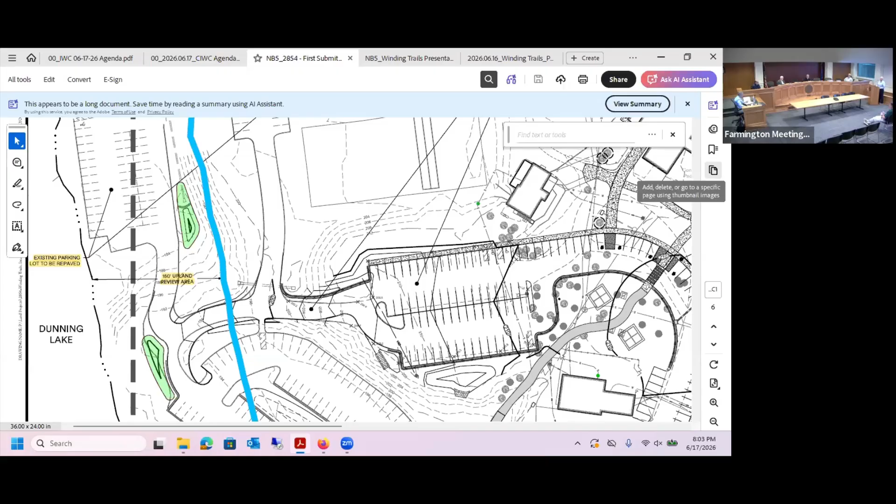So when we set up the meeting, Bruce, we should select the meeting point. I'm thinking, since it's such a big facility, maybe just start right here, park right over here. We call that the boathouse, we'll park somewhere right around there. There's a cul-de-sac right in front of it.

Can I park there? I usually send everyone a little map of where to park too. Is there more parking over by the paddleball courts? Yeah, that's one of the least used lots, we call it the lower lot by paddleball.

That area is within the 150 feet. Is this it? No, that's Sportsplex, next one over to the left. This one down here, in front of the paddleball court. There's a little gazebo there. Oh, that gazebo's gone? A pavilion now.

So we could start there, and that takes you, your starting point will be the regulated area. Yeah, I'll send you something. Did they do that pavilion last year or the year before? Two years ago. So the tennis paddleball court parking lot, is that the meeting point? I'll do a little map when I send it out to everybody.

I just think the boathouse area is very crowded. And for non-members, Scott will notify the gate attendant that some non-members will be coming in. And we'll determine significance after the site walk.

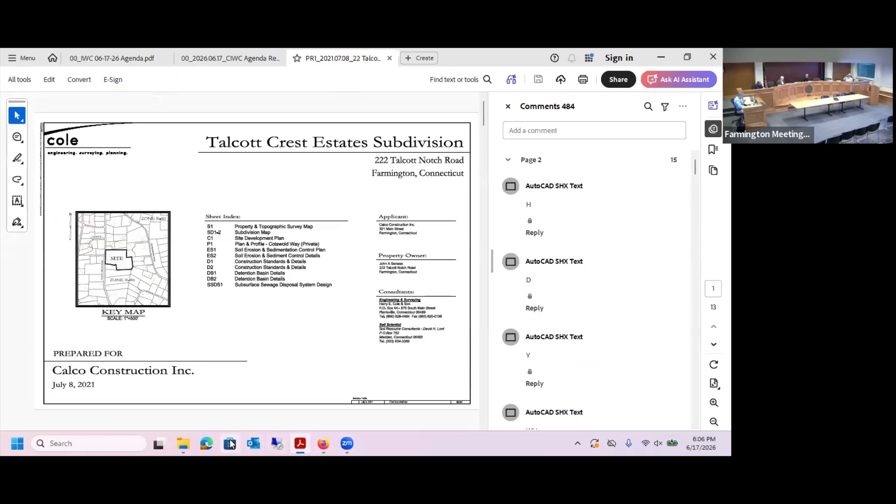So that moves us to the planner's report. I do have something that came up after the agenda went out, so I'll go over this quickly. I do have the engineer on here as well, so I'm going to let Mr. Whitney jump in if he wants, or answer any questions you guys have. Some of you may remember Talcott Notch.

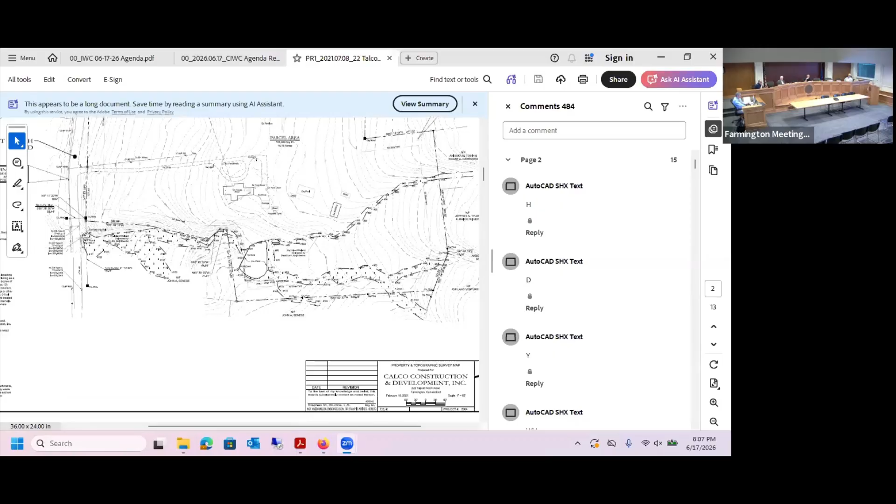As you go up to the top of Talcott Notch, almost towards the Avon town line, there was a subdivision. It was part of an existing home, an older home, with a pool and a little pool house. There was an approval for four lots, I think it was.

Let's see here. So keeping the existing house here. So no, there's 1, 2, 3, 4, 5 lots. So a homeowner bought the house and did not want the subdivision, so they actually erased the subdivision. Now we're back to 1 lot.

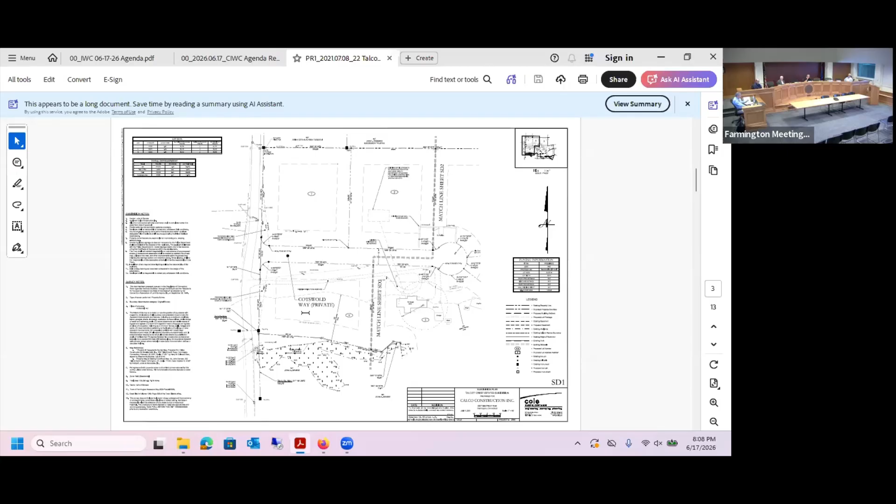Okay, so what they've done - I apologize, sorry, it's 2 lots. They actually saved a lot over here, if I recall. So as part of this subdivision, or as part of the new owner's plans, they have the existing house, they have a pool, and they have what I'll call a pool house.

As part of this approval, the new owner would like to turn this into an ADU, an accessory dwelling unit. And it's not to rent out, it's more for family - if family comes in, they could stay and put something in there.

So there is actually an existing septic system for this building, but it's so old there's no plans for it. No one really knows where it goes. All they know is that there's an old septic tank out back and it goes somewhere this way. They don't know the limits at all. So as part of the plan, they've been thinking of a few different options.

One of them was to run a new tank and a gravity line. Let me go to that plan, let me jump in on that one.

Was there a dam on this property? Yes, the old pond had a dam. Okay, I remember going there. Yeah, I was trying to remember - I don't think I did the site walk with you guys at that time.

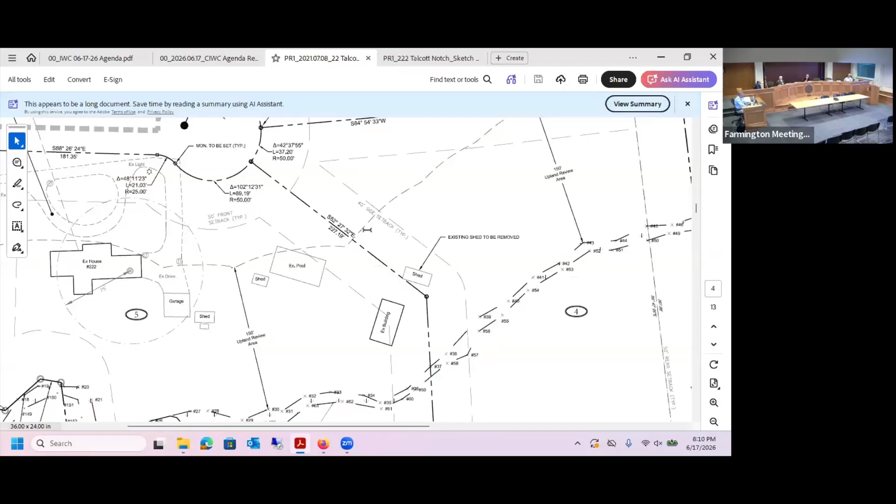There was discussion on a potential second option: put a septic tank in with a pump chamber, then pump it with a force main all the way out further away from this, and way outside of the 150-foot upland review area. So there was a question regarding permitting.

My personal feeling was that if we do anything down in here, we definitely need a permit, because if you look at the plan, this is the 25-foot setback, so they're definitely within that. Yeah, they're probably within 30 - the toe of it is within 25 feet. I assumed the commission would want to see a permit on that.

But the question was, if they decide to do the pump system instead, since it's mainly in a lawn area with no disturbance of any trees, no cutting through the woods - if we allow them to replace the tank with a new pump chamber and just do a force main, which would be a 1.25 inch flex line, dig it through the yard and put it up into an upper area out of the 150-foot upland review, would we require a permit for this? Could we allow it under incidental use? You're not really disturbing any wetlands, you're digging in the upland review of an existing lawn area.

So I do have the map here, I can zoom in on it - maybe that'll help you.

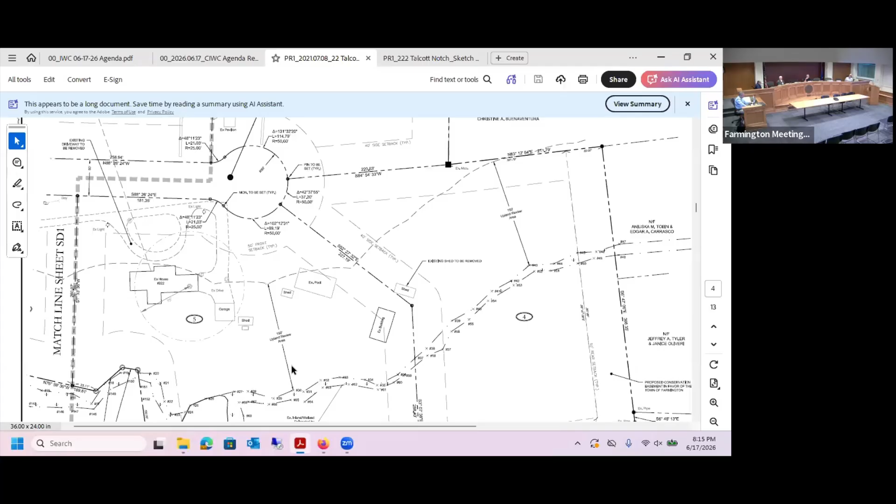Now, for the main house, where is the septic system? Is it in the back, Dave? I believe it is, I actually don't know. I mean, that was... I think it was. If you look on these old plans, I think there was, I think when they put in for the subdivision, they had to show us. We were trying to show where the septic system was.

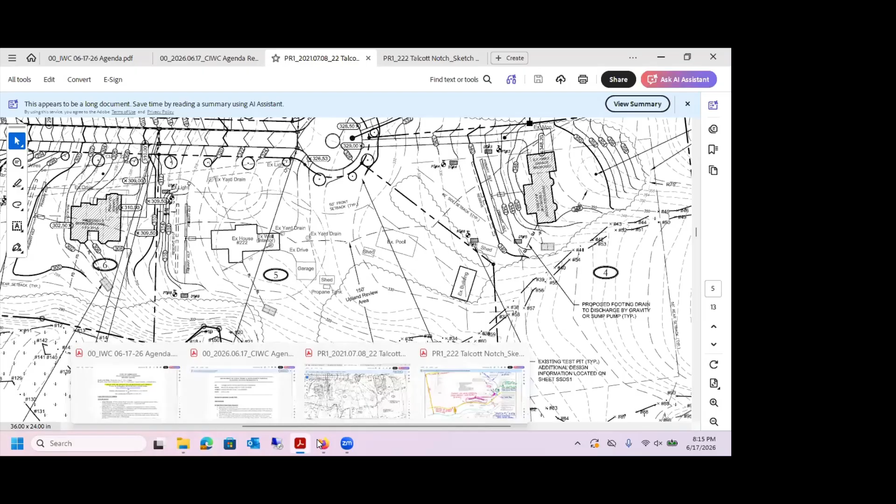Yeah, that was the new system. That was a new system just in case if the old one didn't work, that's what that one was. But yeah, I remember it being in the back because the house is very old, so they didn't have exact records on where it is. In the back of the house, the land slopes down, so I suspect that's where they put the septic system, right where Bruce is waving the cursor. I suspect that's where the system is.

I kind of remember that when we're looking at it for the four lot subdivision. Okay.

I don't know if the excavation for the tank is in the grass area. So when you say they need a permit, I mean they still have to go to the health department and get all that approved, right? They have been working with the health department, they actually have an approved plan. It's been approved, it was approved yesterday. Yeah, the one for down here has been approved. The septic system as shown in pink has been approved.

Okay, well, if you're gonna go with that one, you need an inland wetlands application. If you go up to the north, then I think it's debatable whether you would need, if there's minor tree clearing to run that line to the north and to put in the new system. I mean, I could go with town staff taking care of that.

But, could I say something? Yes. Okay. Well Dave, first of all appreciate you fitting us in tonight because I know it's been a long meeting.

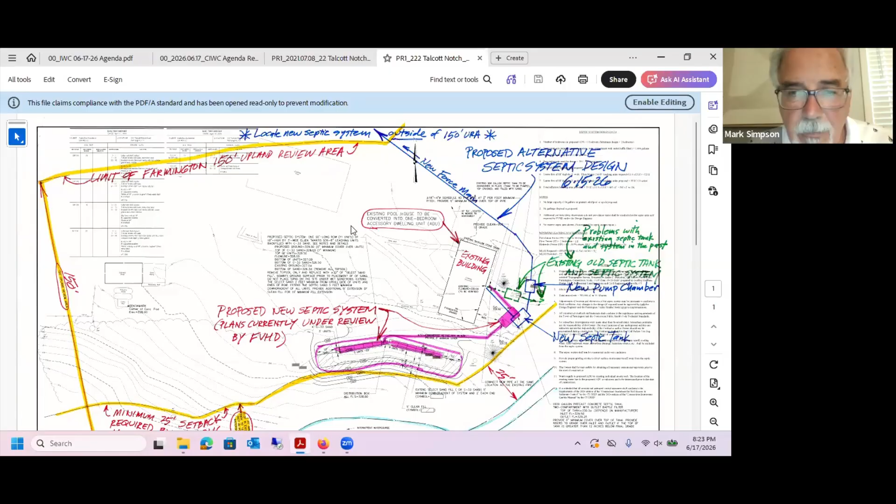So the question is should we be requiring an application for either option? I think that both options would require an application to the inland wetlands. You agree with that, or? I think with the pump situation, doesn't that mean it's off outside the review area? The septic system is, but not the pump - not the tank and the pump chamber and the force main, but the septic system would be outside of the upland review area.

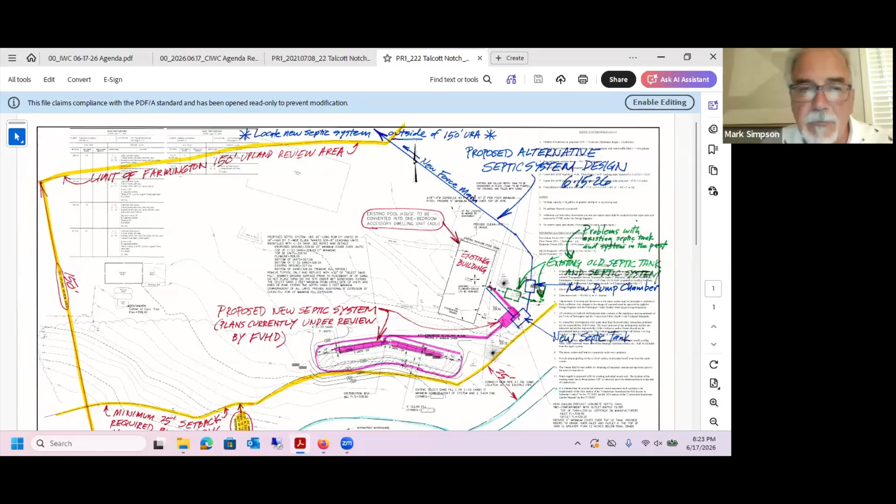But the work for laying the pipe - they'd be in the area. So I guess you would have to have an application. Alana? I agree that both options would require an application. Frank? I concur that an application is required for installation of it. All right, it seems unanimous that an application is going to be required for either option that the applicant chooses.

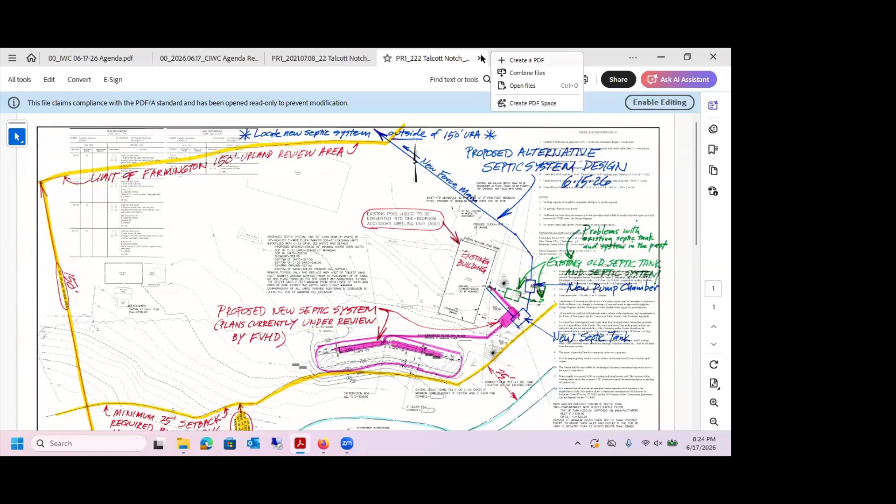Chair will entertain, is there anything else in the planner's report? No, that's it. Chair will entertain a motion to approve.

Let's do them both: approve the minutes of June 3rd, 2026 Inland Wetland Commission, and approve the minutes of the June 11th Commission site walk. Can I get a motion, please? So moved. Mark. Second. All right, Mark gets second. Motion made, seconded to approve the June 3rd Inland Wetlands Commission meeting minutes and the June 11th Inland Wetlands Site Walk minutes.

All those in favor say aye. Aye. Opposed? Abstain? Motion passes. So we will adjourn the meeting, Inland Wetlands meeting, at 8:25.

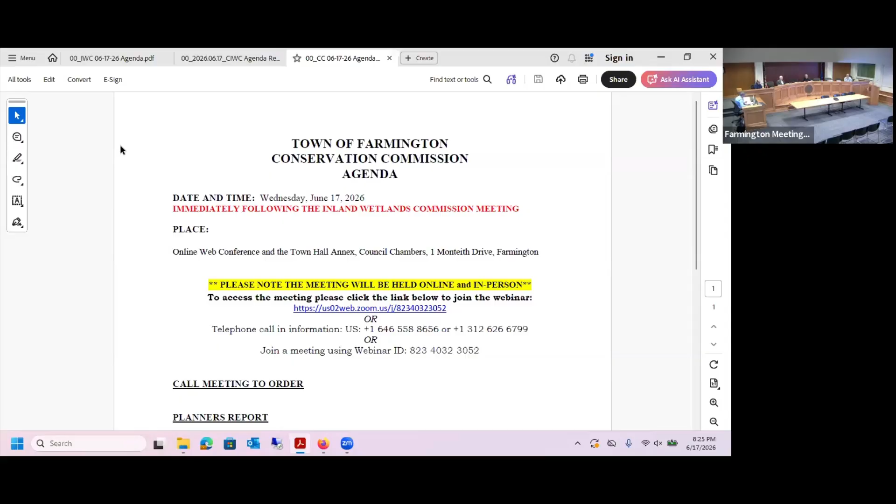Call the Conservation Commission agenda meeting to order, 8:25. Is there a planner's report? Nothing. Okay, Chair will entertain a motion to approve the minutes of June 3rd, 2026. Second. Motion made and seconded to approve the minutes of June 3rd. All those in favor say aye. Aye. Aye. Abstain. Motion passes.